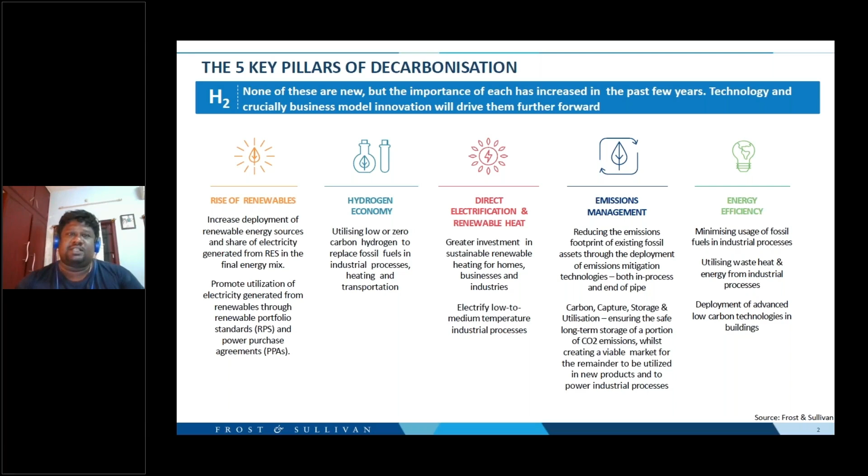Coming to the key topic of today, the hydrogen economy. In recent years, there has been a lot of interest across many governments and institutions. Many countries have come up with hydrogen strategies in which they want to implement and build a lot of hydrogen infrastructure.

They want to use hydrogen across much of their business sectors, including mobility and industries, as well as store hydrogen so it can be used on demand. There has been a lot of hype and recognition of hydrogen as one of the green carriers, through which hydrogen can cut down a lot of emissions and enable us to reach carbon neutrality.

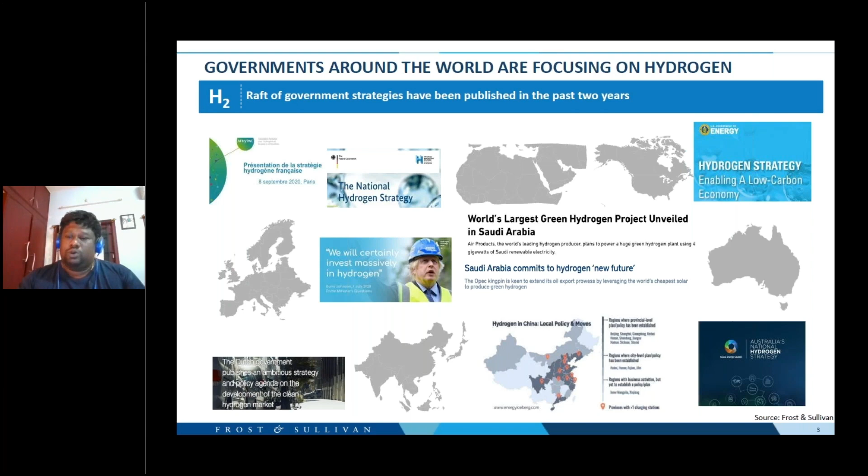So why all this hype over hydrogen? Why not any other element or chemical? The main thing is that hydrogen is available everywhere, so it can be produced in a variety of ways, stored and transported, and converted into different forms through which it can find applications across different business segments.

For example, hydrogen produced from renewables is called green hydrogen. It can find application across industries like steel, where it can cut down a lot of carbon emissions. When combined with nitrogen, we are able to get green ammonia, which can be used as a fuel for marine ships, cutting down a lot of emissions from the marine sector.

So hydrogen, when combined with carbon which is captured and stored, can be converted into different forms like synthetic methane, diesel and methanol. So it can be used across a variety of chemical industries, and it can be used as a marine fuel as well as an aviation fuel.

So this ability of hydrogen to be converted into different forms, and to be used as a feedstock or a direct source of power generation, makes it a very suitable element, as it can be used to reduce emissions and to decarbonize a variety of business segments.

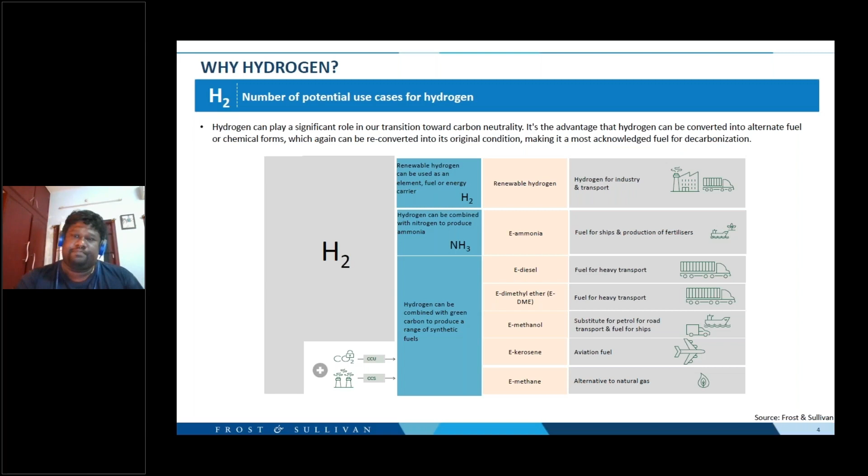So, the hydrogen spectrum. Like I mentioned earlier, based on the type of production, hydrogen comes in different colors. Its more natural form is called gold hydrogen, where hydrogen occurs naturally in geological formations in caves. We have black hydrogen, which is produced from coal gasification. Then we have gray hydrogen, which is formed from natural gas. And then we have the most common, green hydrogen, which is produced from renewable energies.

Also, with carbon capture and storage, we have blue hydrogen, which you produce the same way as from natural gas, but the carbon dioxide released is stored and also utilized for different purposes. So that's blue hydrogen.

And in recent years there has also been much emphasis on a new technology called methane pyrolysis, in which natural gas is converted into hydrogen, but instead of carbon dioxide, the carbon is converted into carbon black, which again finds application across different industries, like producing tires and making pigments. So this hydrogen becomes turquoise hydrogen.

And besides this, we also have hydrogen produced from algae, from biomass, and even hydrogen produced from solar PV and from nuclear as well. So there's a huge spectrum of hydrogen available to us, and the cost economics for each of these processes is different.

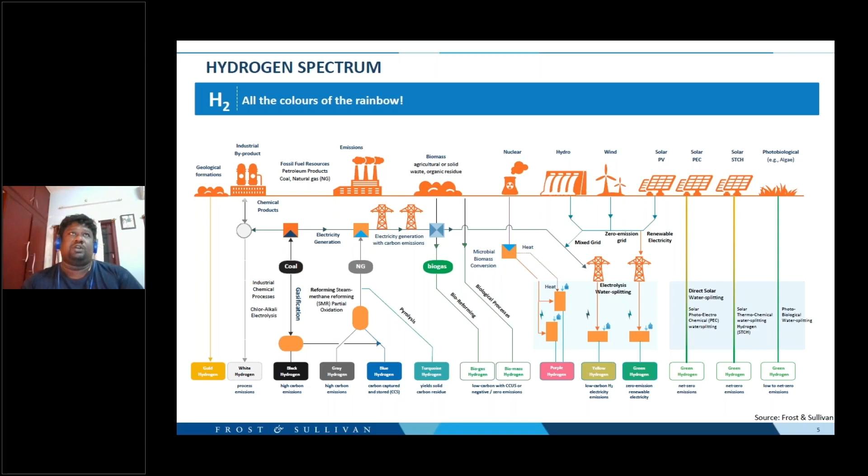Looking at the value chain. In terms of the value chain, we have three different parts: the production of hydrogen, the storage and transport of hydrogen, and the utilization of hydrogen. And each of these elements has huge challenges in itself.

Right now, green hydrogen is produced from renewables, but in the future, the amount of hydrogen required to decarbonize any industry will require huge amounts of dedicated renewable energy capacity. So that's going to be one of the challenges in the next 10 to 15 years, where many countries would definitely require dedicated renewable energy capacity to produce hydrogen.

That's going to be one of the challenges, because right now much of the renewable energy capacity is only used for balancing demand and supply as well as for energy security. But as the demand for hydrogen increases, we would need dedicated capacity for hydrogen, and that's going to be one of the major challenges.

The next major challenge for hydrogen is the absence of dedicated storage and transport infrastructure. Right now, one of the main ways to transport hydrogen is to convert green hydrogen into green ammonia, which can be transported over different distances via ships. And many countries have put forward plans in their national strategies for converting hydrogen into green ammonia and then transporting it over larger distances.

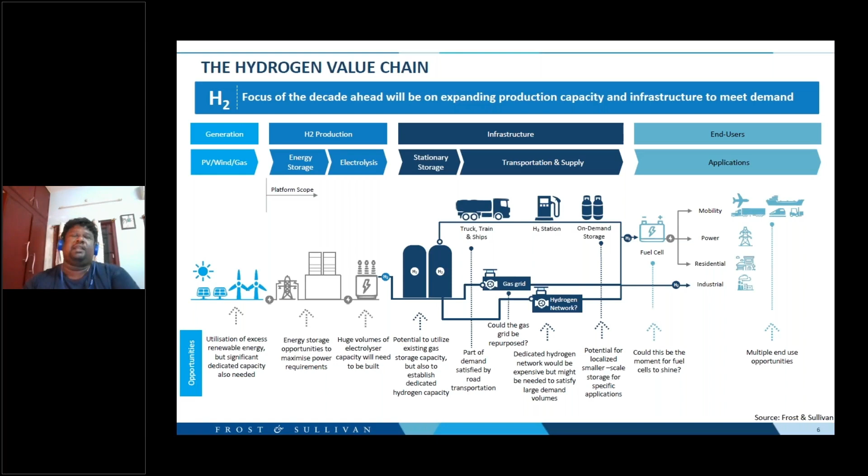And in terms of utilization, many countries are initially focused only on utilization of hydrogen across the mobility as well as the industry segment. That's where the bulk of the carbon emissions come from. So in the next 5 to 10 years, in terms of utilization, the bulk of the hydrogen applications will go to the mobility and industrial segments.

So looking at the key countries which have their own hydrogen developments, the US is one of the key countries because the country has tremendous renewable energy potential, and in terms of technology, it has a wide variety of industries and startups focused on hydrogen technologies, and they're actively collaborating with each other to work on different hydrogen technologies. And the US is also planning to become one of the key exporters as well.

It's already in talks with Asian countries as well as Latin American countries where it could export the hydrogen. And in terms of which hydrogen, the US is looking at both green and blue, because carbon capture and utilization is already commercial in certain parts of the US, and there are a lot of pilot projects going on targeting production of blue hydrogen across different states.

And coming to Latin America, the whole region has a huge potential for renewable energies, and a lot of potential to produce green hydrogen. Chile is one of those countries with a lot of wind potential, and in its hydrogen strategy the country has come up with a plan to become a leading exporter of green hydrogen, and they also want to develop the cheapest green hydrogen market as well.

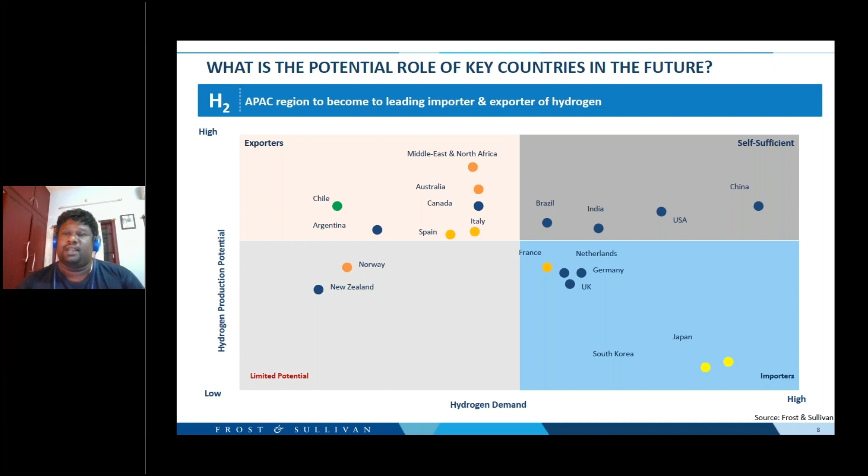And in terms of key areas of support, we have industries and transport. Much of the focus across the different countries is only on industry and transport. That's where the bulk of the carbon emissions from Europe also comes from.

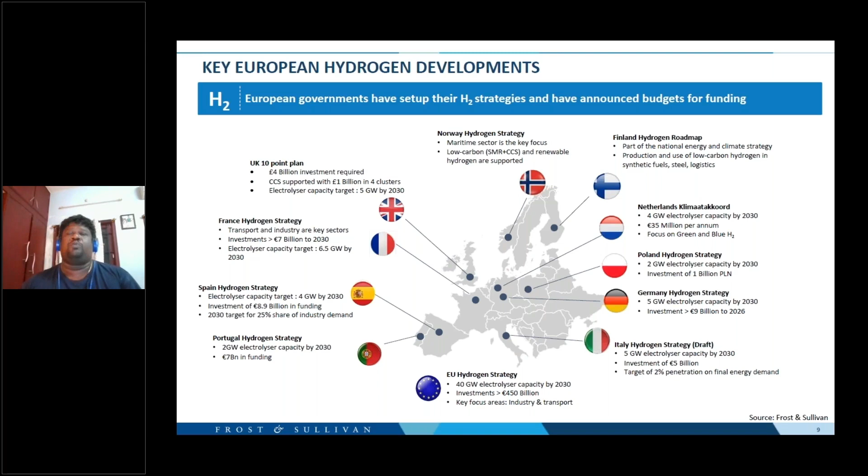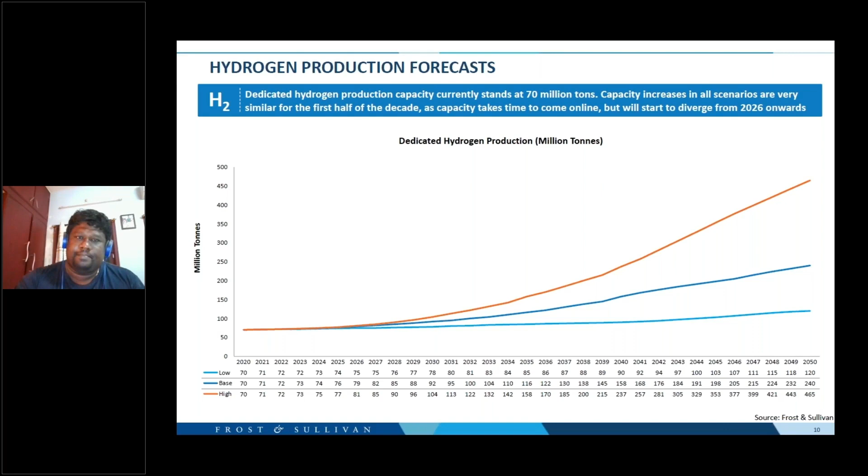And also many countries are now thinking that, instead of retiring the nuclear capacity, they can redirect their existing nuclear capacity to produce hydrogen as well. So hydrogen produced through methane pyrolysis and also nuclear hydrogen is one of the ways in which we can produce more hydrogen and meet the hydrogen demand as well.

So other forms of hydrogen are also expected to take over post 2030, and we expect to see a lot of interesting things, a variety of different production methods reaching cost parity with gray hydrogen and taking over the production as well.

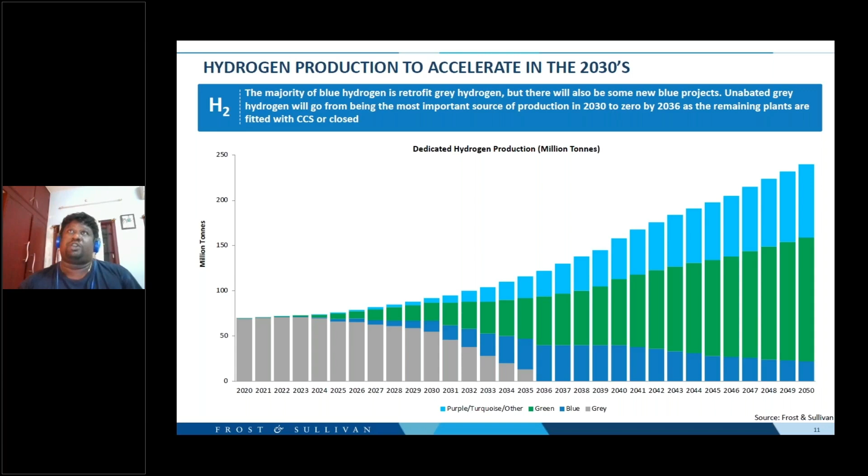In terms of the hydrogen market, the ecosystem, the entire market right now is very much a happening space where there are a lot of companies, a lot of startups, a lot of SMEs in this space across a huge variety of hydrogen. We have a lot of companies as electrolyzer manufacturers. We have a lot of infrastructure developers, a lot of companies focused on storage, and we expect to see this market becoming more and more active in the coming years. And we also expect to see a lot of mergers and acquisitions happen across this market as well.

So coming to the roadmap for hydrogen, the key takeaway message is that the hydrogen economy cannot be achieved in a matter of 10 years. It would take at least 10 to 15 years for us to establish a proper set of groundwork and regulatory frameworks on which we can develop the hydrogen economy.

So the next 5 to 10 years will be basically about development of proper regulatory frameworks and development of pilot and demonstration projects. And post 2030, we can see a lot of commercialization happening, as well as the rollout of big electrolyzer and renewable energy projects. And post 2040, we can see huge gigawatt scale electrolyzer projects coming online, and a spectrum of colors of hydrogen coming up to supply the demand for hydrogen.

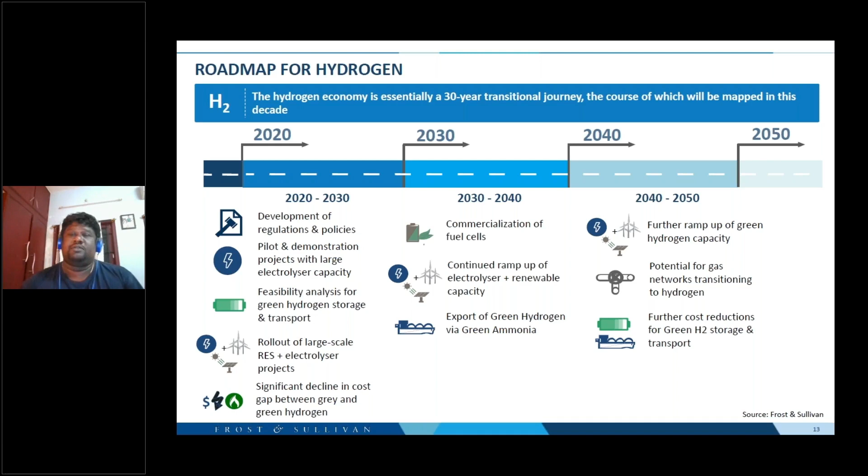So in terms of key growth opportunities, we identified 4 main growth opportunities for hydrogen. One is power to hydrogen, which is converting the hydrogen into different forms, which can be used as a direct fuel or as a feedstock across different industries. The other is the important role of ammonia as a green energy carrier, which can be used to decarbonize the maritime and aviation industry, as well as used as the storage medium to transport the clean hydrogen, and hydrogen itself as an energy storage medium, which can be used during peak demand. So that's also one of the growth opportunities identified for hydrogen.

And lastly, development of dedicated infrastructures like hydrogen refueling stations, hydrogen production centers, and everything. So that's going to be one of the growth opportunities in the coming years as well.

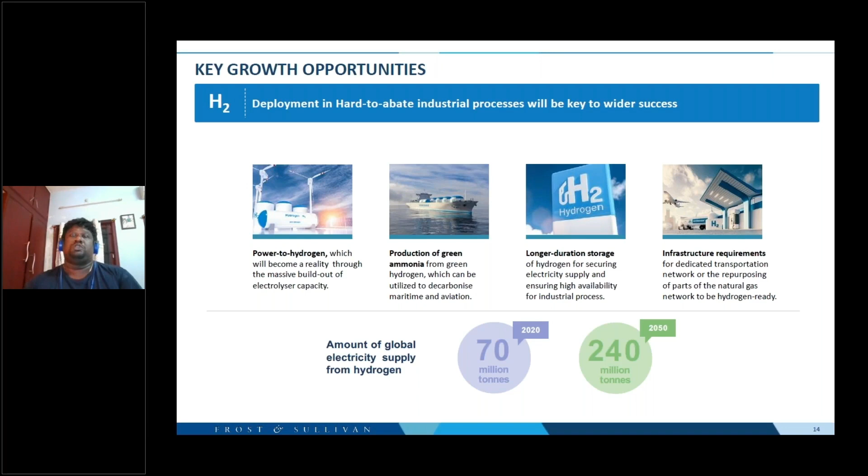So power to X technologies. This is a way in which hydrogen can be converted into different forms. It can be converted into a fuel which can be used for running fuel cells. It can be converted into a different chemical form which can be used across the chemical industry. Methanol can be used across the chemical industries, glass industries or petrochemical industries. It can be used as a direct fuel in the steel industry as well.

So the process of converting hydrogen into its different forms is called power to X technologies, and this is one of the key growth opportunities of hydrogen. And Denmark, in its hydrogen strategy, has identified this power to X technology as one of the key ways in which Denmark can achieve carbon neutrality.

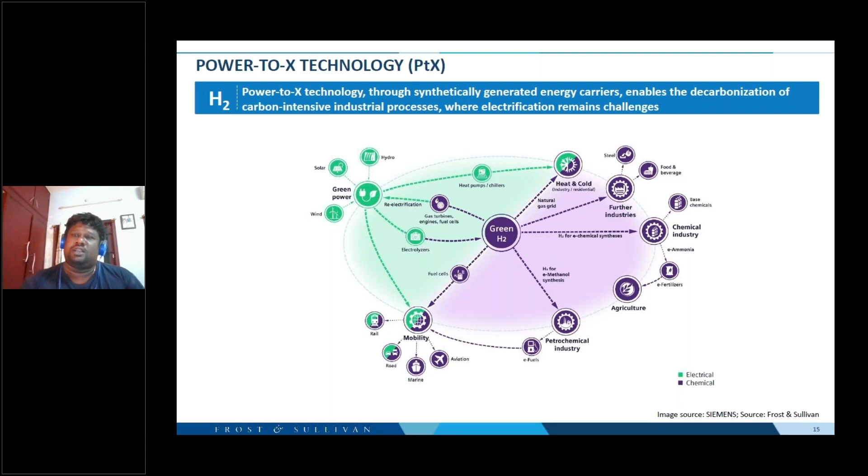So I talked about ammonia. Earlier, ammonia was used mainly for fertilizers and parts for textiles and pharmaceuticals. But in the coming years, when we have a huge renewable energy potential, that renewable energy can be transported to different parts of the world by converting it into green ammonia. And this green ammonia can be used for electricity generation, as a fuel for maritime and aviation, can be stored and transported, like I mentioned earlier, and also used across the key chemical industries as well.

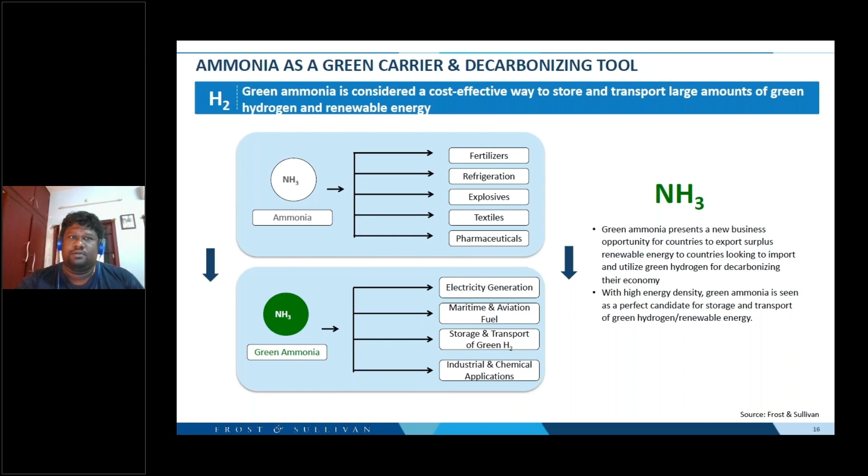So in the next 15 years, green ammonia becomes a new commodity for countries, to either use as a decarbonizing agent or as a transport agent as well. And I already talked about blending in hydrogen. This is again one of the key growth opportunities through which hydrogen can be either stored and transported, or it can be used for supplying heat for industries, in which carbon emissions can be drastically cut down.

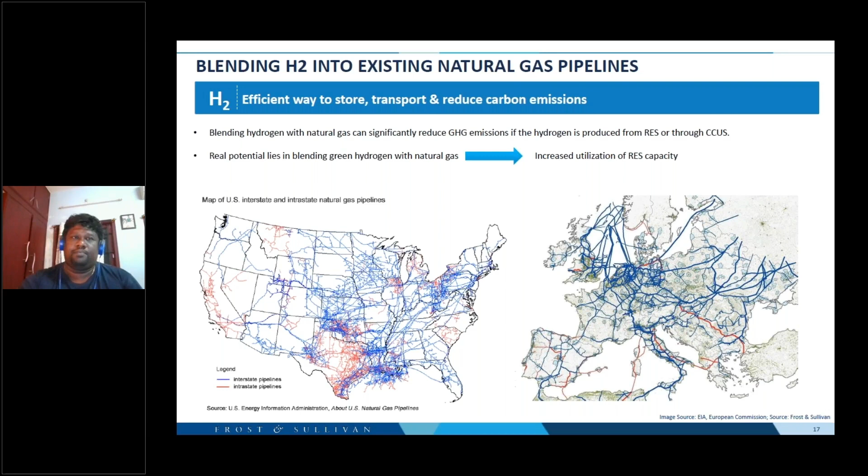So coming to the key conclusions, the focus of the decade ahead will be for countries to first establish a proper set of regulatory frameworks, and also get the investments ready for building up the infrastructure. The next important thing is countries should expand their R&D so that they can bring down the costs associated with the production as well as the storage and transport of hydrogen. And the third important thing is we need to ramp up the electrolyzer capacity to bring down the costs associated with the production of hydrogen from electrolysis.

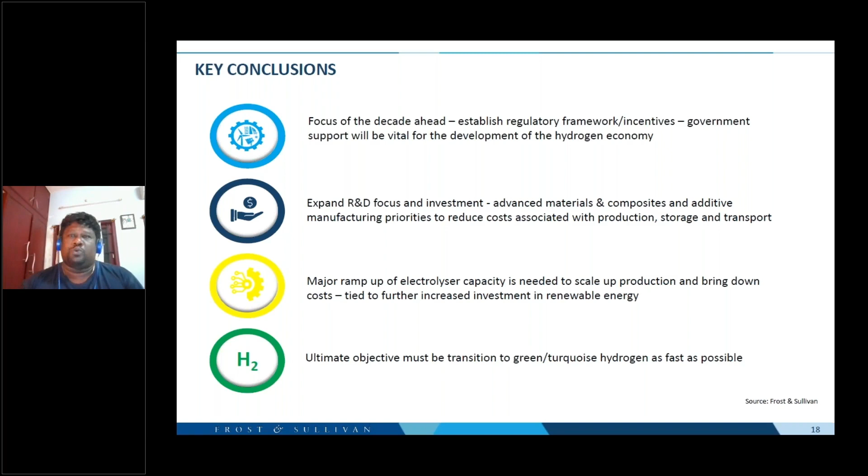And lastly, instead of just green hydrogen, every country should also focus on other colors of hydrogen, like turquoise as well as pink hydrogen, that is using nuclear, which can also be used to satisfy the demand for hydrogen in the coming years. So it's going to be really interesting years for hydrogen, and we believe that the hydrogen economy could be the answer in order to achieve climate goals. Thank you.